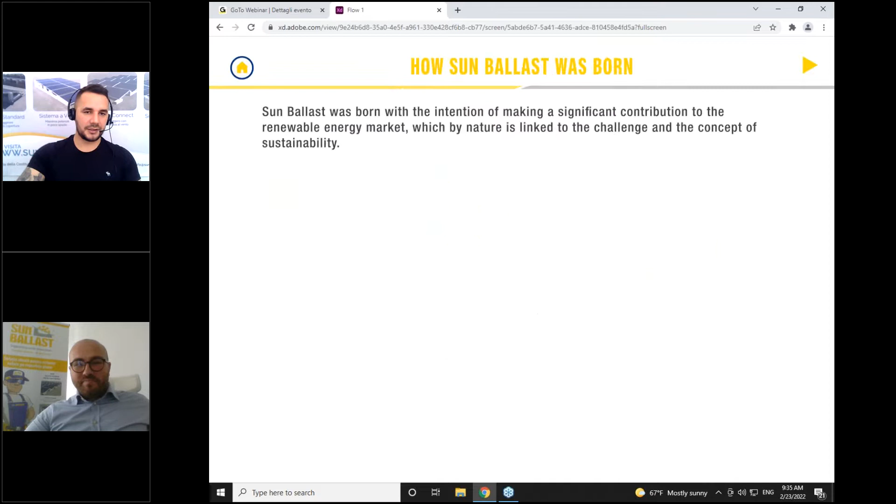So how was Sun Ballast born? Sun Ballast has been in the market now for 10 years. We are a leading manufacturer company in Italy. We produce structures for PV systems. Our structures are made of concrete, with different types, different sizes, different shapes, different inclinations that we offer.

Sun Ballast was born with the intention of making a significant contribution to renewable energy, linked with nature and the challenges we might face daily. It was created by two persons, two friends, two colleagues, who are still very close together: our executive director, our CEO, Mr. Iannuzzi, Maurizio Iannuzzi, and his partner, Giuseppe Di Tella.

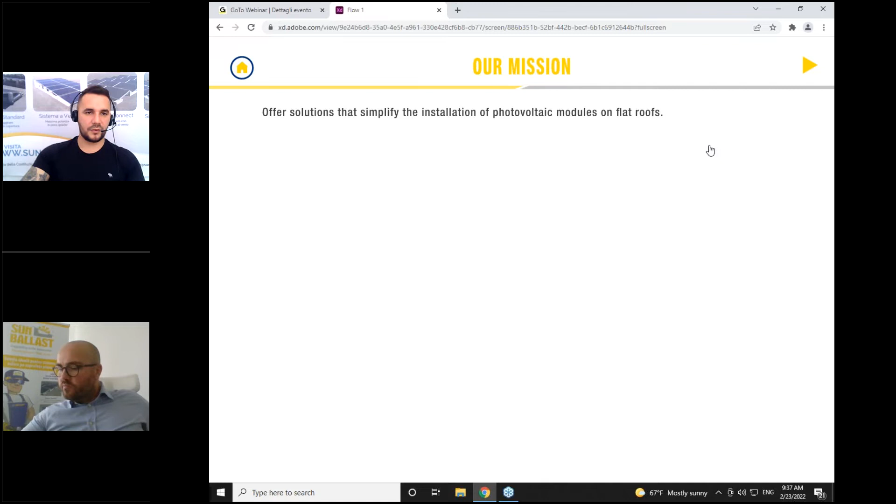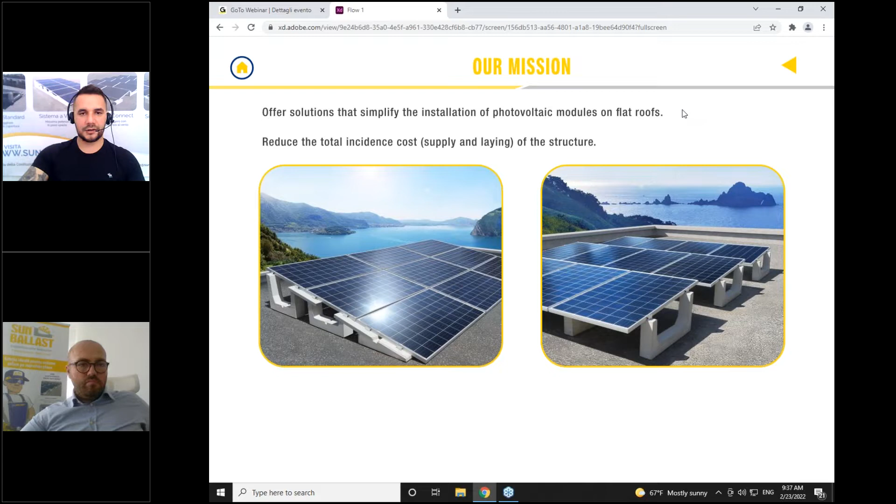So to simplify all the installation of photovoltaic modules on the flat roof and reduce also the total incidence cost of supplying or laying of the structures, we came up with a different type of solution, a different type of system for all the problems that you might have, which we will see together later.

Another question I want to share with you: what do you do in your company? For all the attendants here today, I would like to know a bit more, like what is your profession, what you do for your company. We have installers, we have EPCs, designers, or others.

So depending on that, those were the options we put. Okay, we got 50% so far installers, 20% EPC, 30% designers. All right, it's growing, it's changing. We have 13% others as well that do different things.

So Sun Ballast, what do we offer? First of all, I would like to share with you the consultancy service that we offer. For those of you who've worked with Sun Ballast before, we do offer a free consultancy service. Whenever we receive a project from each one of you, from all our clients, including those who are new, we have a team dedicated to doing all the technical reports for your project.

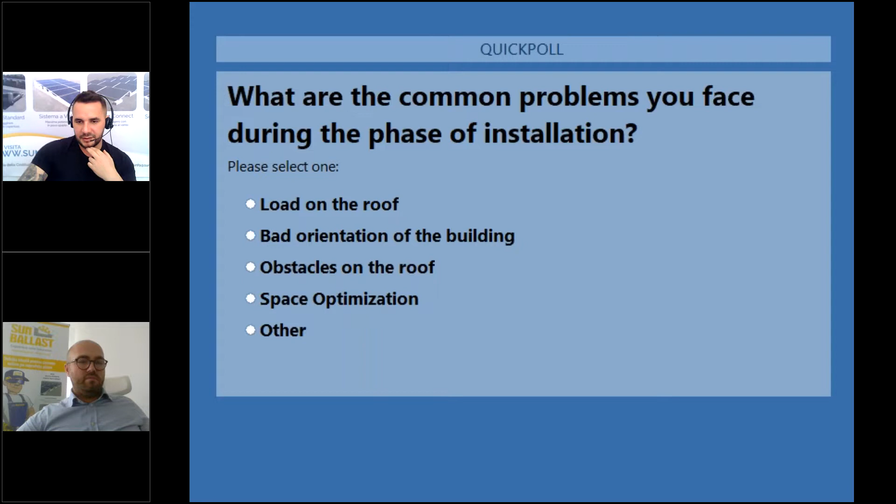Okay, we see so far the main problems that they face are obstacles on the roof at 43%, and bad orientation of the building. I'd like to share this with you so you can see the results: 38% obstacles and 38% bad orientation of buildings, which Sun Ballast already has a solution for both of these, as well as space optimization and the load on the roof.

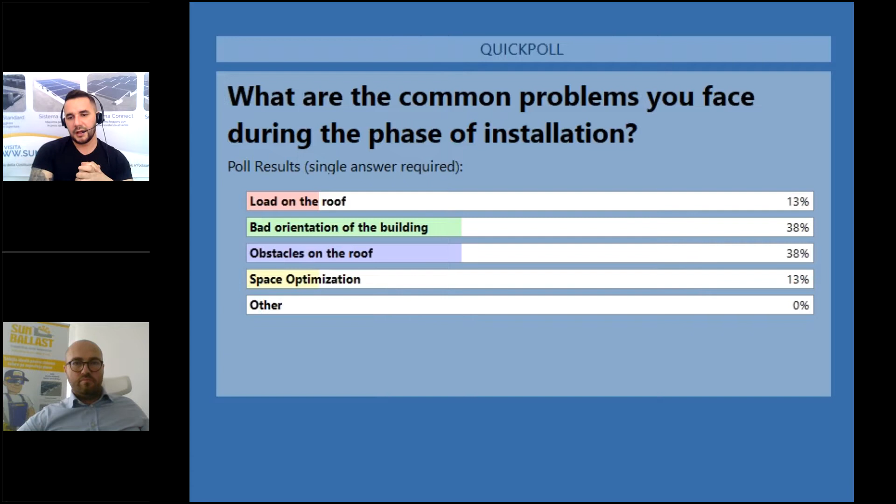First solution that Sun Ballast offers: for obstacles on the roof. Of course, we have a lot of roofs that come with different types of obstacles. You have chimneys, vents, antennas, different types of structures, and it's sometimes really hard to realize the installation there.

So what Sun Ballast came up with was our standard system. Before I start, I'd like to share with you a video that our technical director did using InSun. One second, this will be the video.

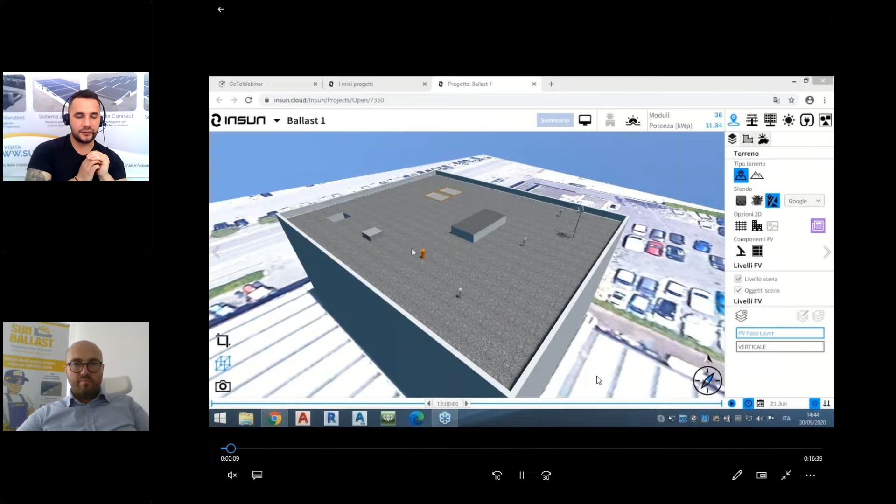Let me know if you guys see it. Okay Alberto, can you see the screen? Yes, perfect.

So what we see here is a software that every one of you can use. It's called InSun, for those who don't know - a software where you can design your system using Sun Ballast structures. The first simulation our technical director is doing, we already wrote the coordinates on the roof, and we took a roof with a few obstacles.

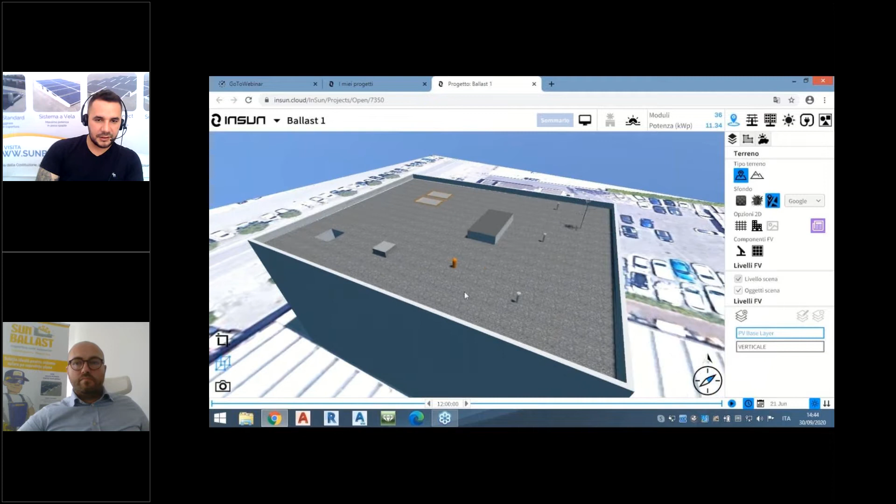As you see here on the screen, Andrea is trying to add some obstacles, and he will add our standard system. Here on the side, he already created a simple system with our standard system, standard ballast.

As you see here, we have a 10 degree ballast being used for this simulation. You will see now how flexible this system is.

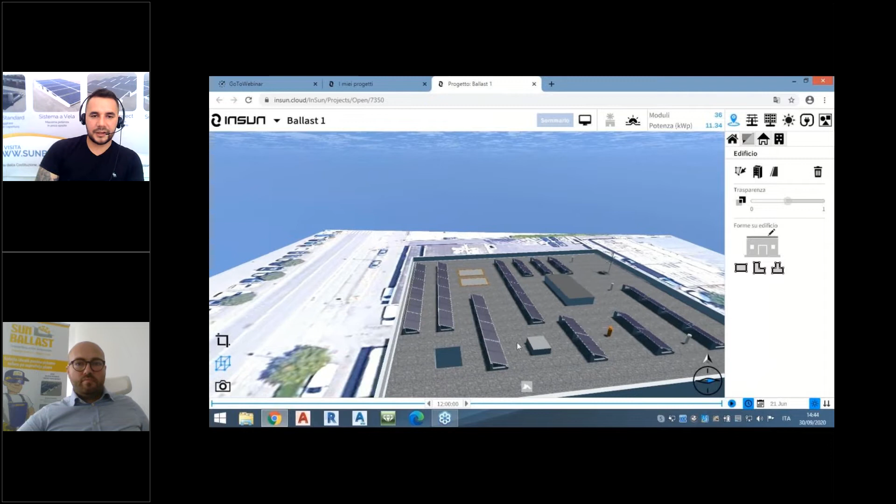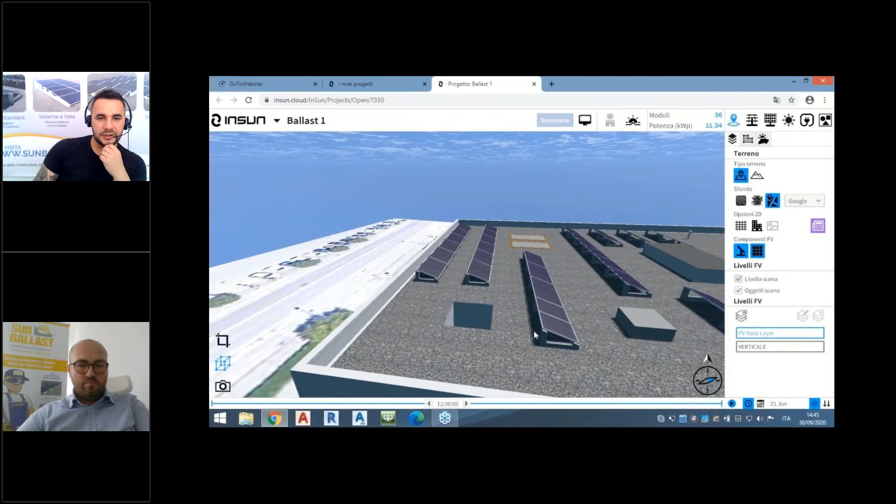The system itself consists of single standard ballast that you can place wherever you have space on the roof. Of course, with this system, you're also allowed to add or remove ballast whenever you want to fill them, always keeping the distance to avoid issues and shading problems between them. As you see, he switched from horizontal pose into vertical pose on the model.

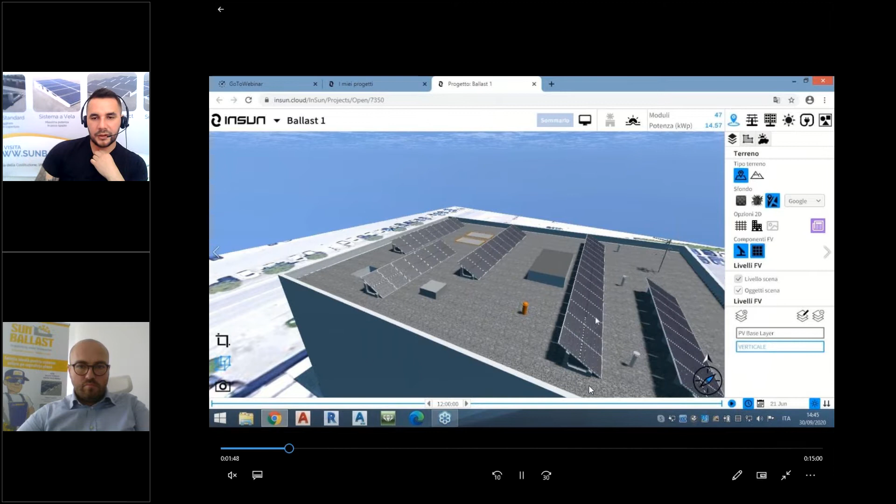For standard models, we can use this ballast even for vertical pose, even for horizontal pose. There's something we'll explain a bit later, because not all models can be placed in vertical pose with all our structures.

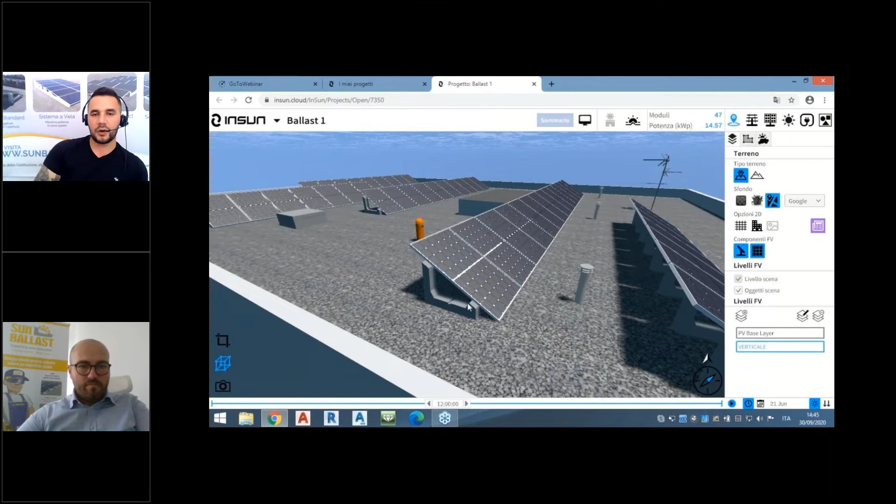So if we're talking about standard models, yes of course. But nowadays we know we have 2x1 models - they're becoming bigger and bigger, and some of them cannot support all the ballast. But for that, we have a solution as well, which I'm going to discuss a bit later.

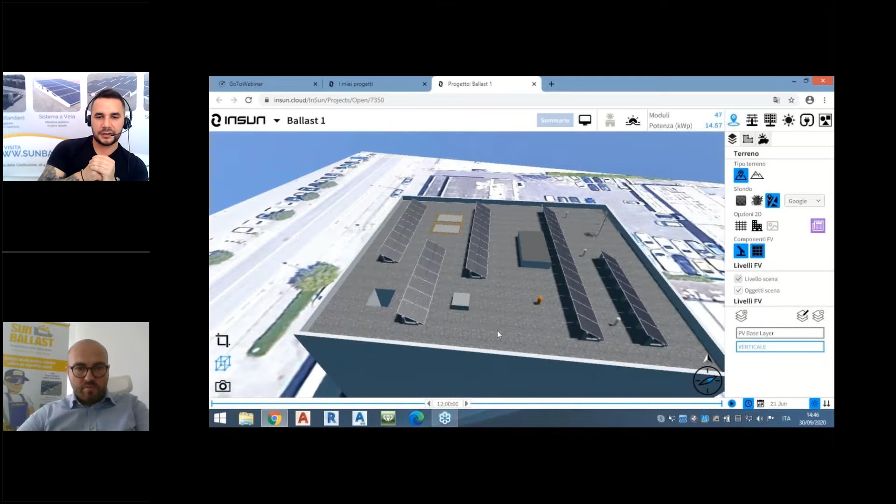Here, Andrea is showing the shape of the ballast. As you see, the ballast is already manufactured from our side, and there's no need for you to drill on it. It comes already inserted with M8 bushings inside, on the top, front, and back of the ballast, in case you want to use any accessories to make the system stronger.

Recapping one more time, advantages of standard system: very high wind resistance because of its weight. It comes with different types of inclination from 0 to 35 degrees, so you can choose any type of ballast you want - 0, 3, 5, 8, 10, 15, 20, 30 degrees, up to 35 degrees in case you'd like a high inclination. It's very quick to install.

Whatever you need to do, whenever you receive our ballast, is just placing a sheet that goes under each ballast, then you place the ballast, the module, and the clamping kit - and voila, the system is already done. These are pretty much the steps. Of course, according to our calculation and the area of your project, we will add or remove different types of accessories.

Low load on the coverage - every ballast, like I said, has different inclination and comes with different weight. We have ballasts that are 16 kilos, up to ballasts that are 70 kilograms each piece. Flexibility is one of the top priorities of the standard system as well - you can move the ballast according to the roof you have, with the ability to circumvent any obstacle on the coverage, plus the wide range of inclination we mentioned.

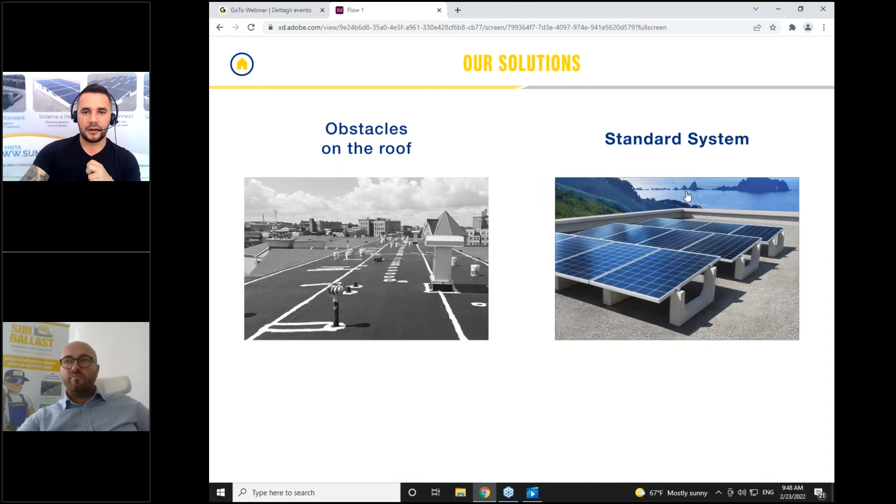Here we move to another solution that Sun Ballast has. As we mentioned before, the question was about space optimization, right?

For those of you who want to do a residential auto-consume project on your roof, a small one with 5, 6, up to 10 modules, we have a system for that, because you might have a really small area of the roof and you want to put as much power as possible. So we created our sail system.

As you see in this picture, this is one of the systems with sail. I'll explain, because we have another system with sail as well. In this video, Andrea is simulating another project.

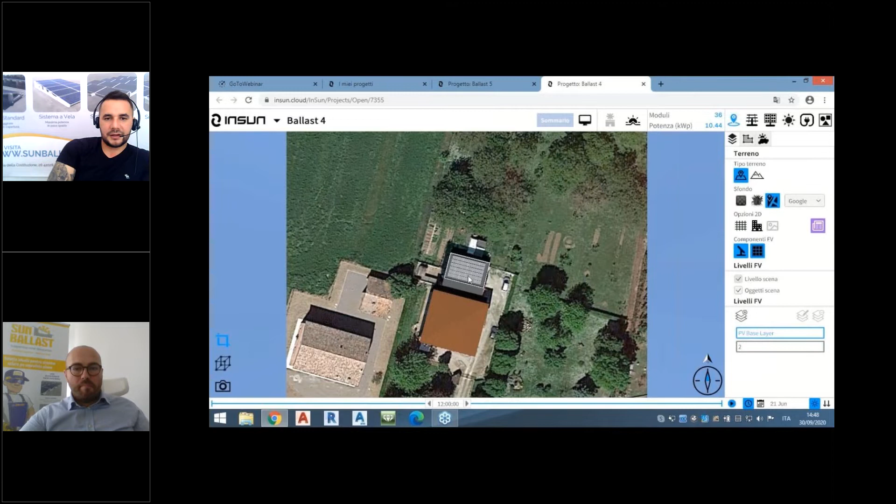The good thing about the InSun software is that you can work online through it, through the coordinates and Google Earth, and choose the roof that you want to do. Here we see a roof that Andrea simulated.

Very little space here. As you see, there are 6 ballasts next to each other. This is our sail system with only 5 degrees. You can use this type of system with the ballast inclined at 5 degrees, and connect all of them together without leaving space between the modules.

As you see in the design or in the video, there is a small space, but that doesn't mean you cannot connect the modules together. It depends on the type of ballast and the type of module you have. Also it can be flexible, because you can add or remove ballasts.

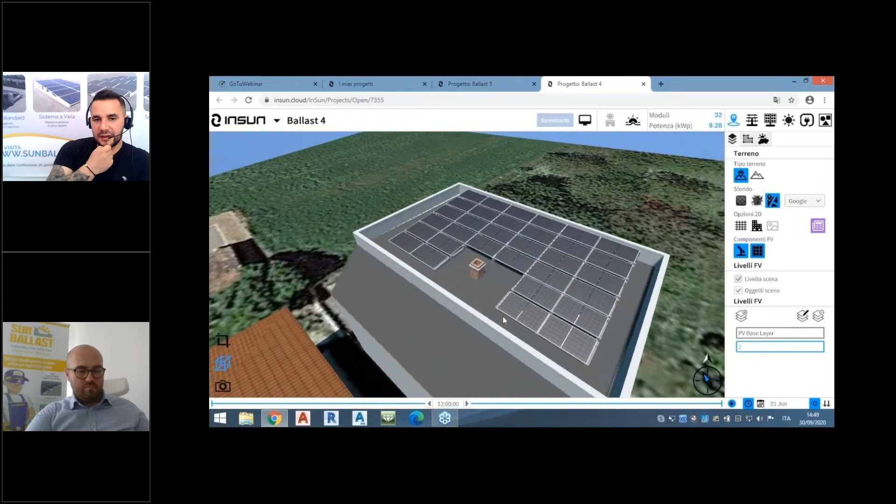Here he created, as you see, a chimney in the middle. So he removed the ballast that was occupying that area, and you can still use our sail system.

This system also doesn't have to come all together. You can order it also by single rows as a standard ballast. You can use from the first ballast here up to the last one as a standard system.

After this simulation, we will see that Andrea created another one using a single ballast from the sail system.

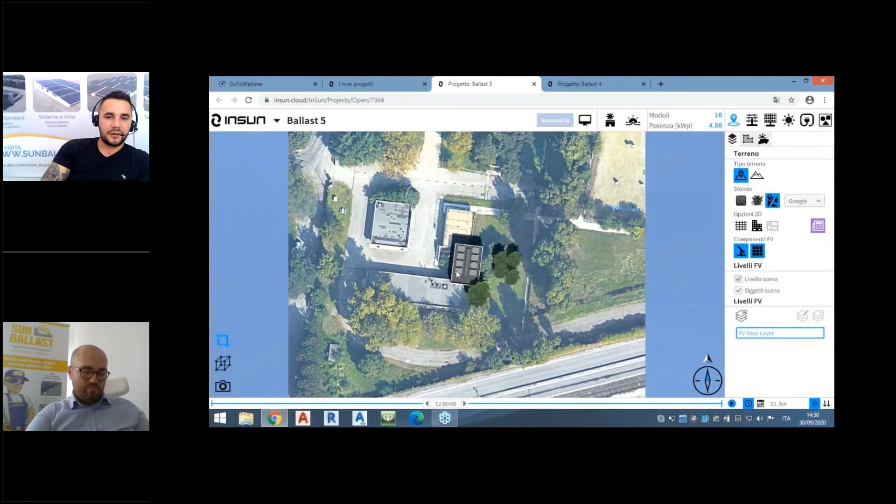There is another roof which Andrea simulated. Here we're going to see that we are using one type of ballast from the sail system, which is the last one: the 5.6 degree ballast, the highest one.

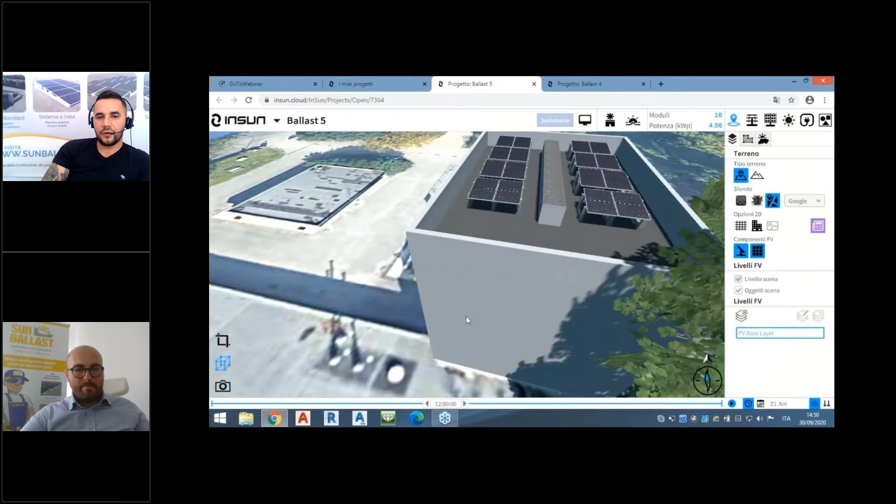The dimensions of it are really high. Why is this necessary? This is necessary for those projects that have high surrounding walls. As you see here, there are high parapets and a tree that Andrea simulated to create shade, and he used only the 5 degree... excuse me, the 5.6 degree ballast.

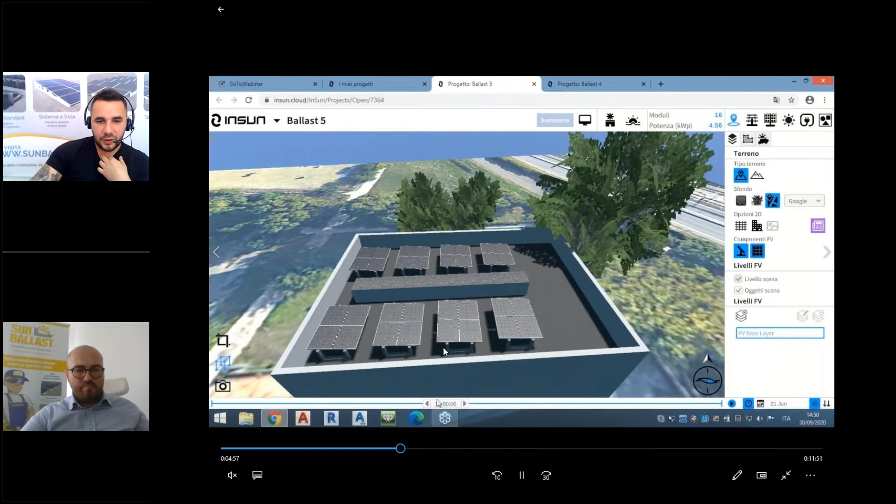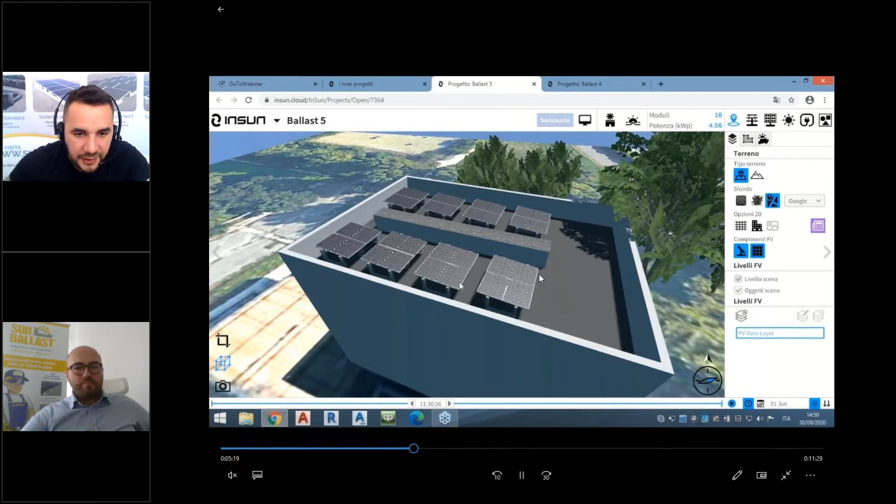As you see here, Andrea is trying to show that you can connect two modules to each other here. You can also add or remove modules. With this system, you can add and remove modules according to the specific layout that you have on the roof.

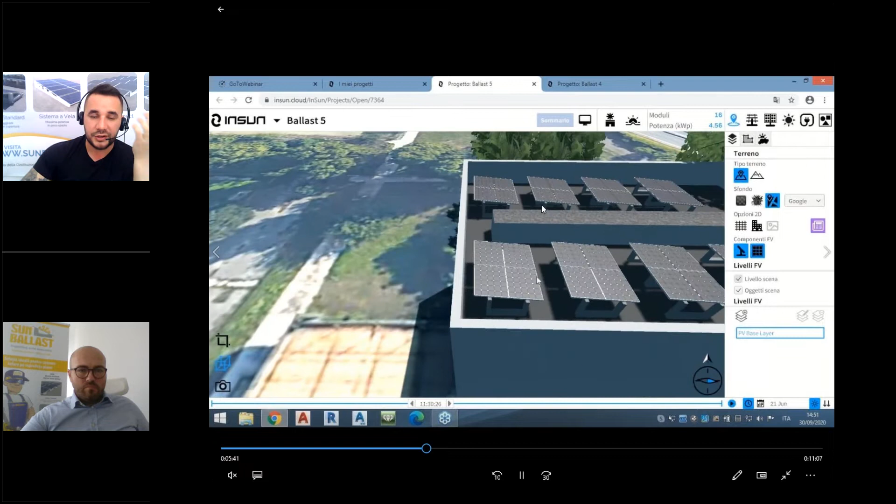This is all for those of you who have an issue with high parapet walls. Our team and our commercials will always suggest whether you can use this type of ballast, or go even lower, or even higher.

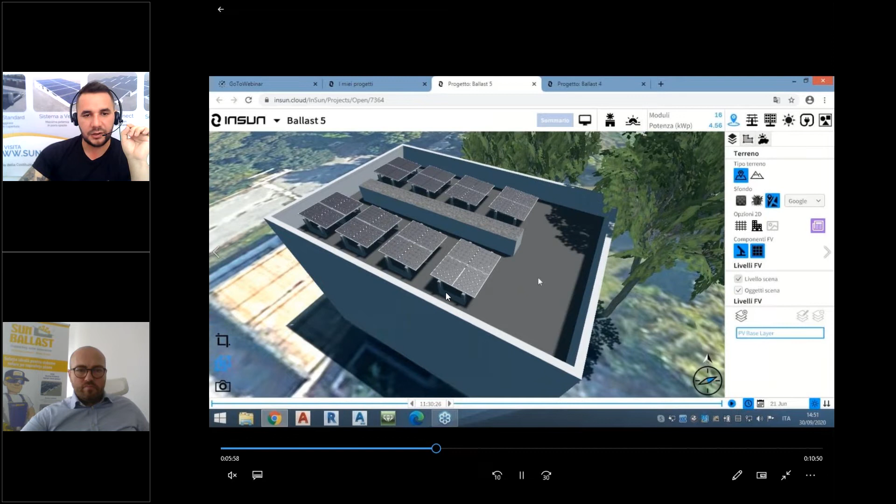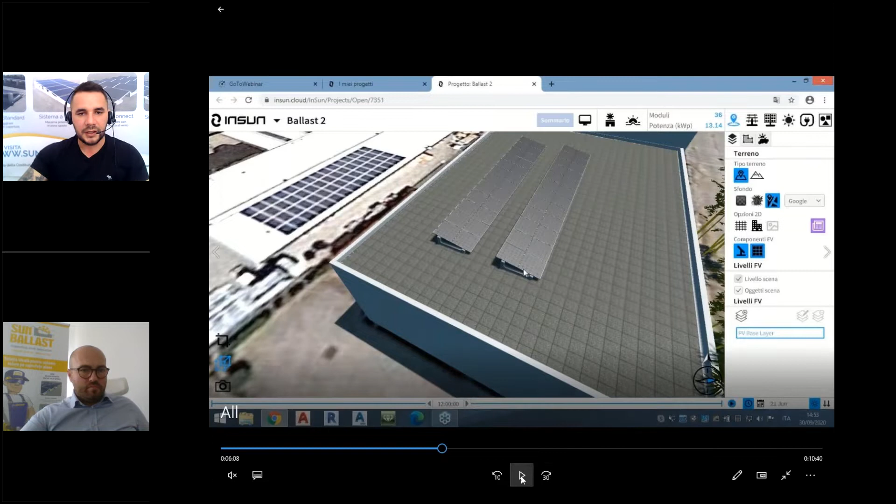Before we go to the other system, I would like to recap the advantages of the sail system. Of course, space optimization is very important, and the sail system already provides that. I forgot to mention that the sail system does not come only with 5 degrees.

You can have it with 11 degrees as well. With 11 degrees, the only difference is that you will have three ballasts next to each other, instead of 6 like with 5 degrees.

You can use those as well as a standard system in case you'd like a higher inclination. You're going to have maximum power in minimum space, fitting as many modules as possible and creating more power. Very, very quick to install. I would like to say that all our systems are very easy to install, and they all share the same idea.

Whenever you need to add accessories, we will be there to assist you along the way. But pretty much it's simple.

Those of you who have done it, okay, we have a question here. I apologize, please give access to Nicola. I don't know if Alex Nicola can hear us, because this webinar is free.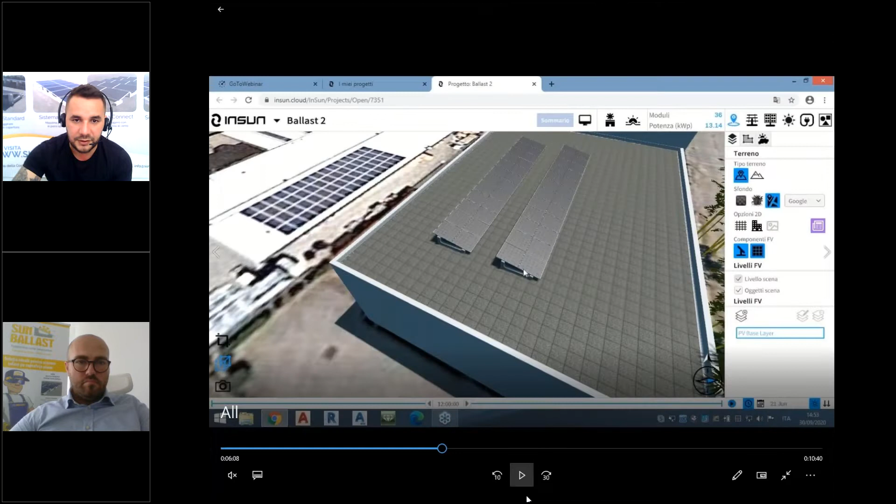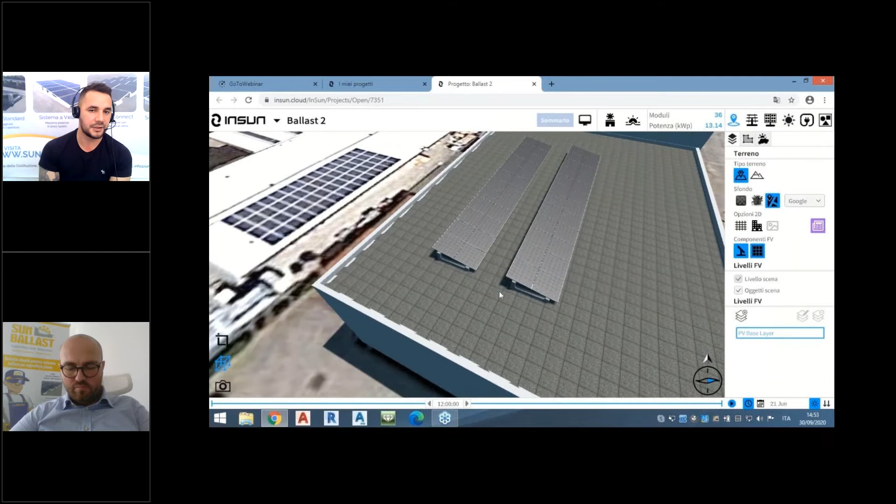In this video, you will see a simulation again with the ballast we came up with for the large models. Here we see Andrea simulated only two rows using a large model. We see that the shape of the ballast is similar to all our standard ballast. It's completely the same. The only difference is that the distance from top to bottom is bigger, so this will support these big models in vertical position.

We see Andrea will zoom in, and we'll see again the shape of the ballast. It's similar to standard. Of course, nowadays we are in contact with all the manufacturers of modules.

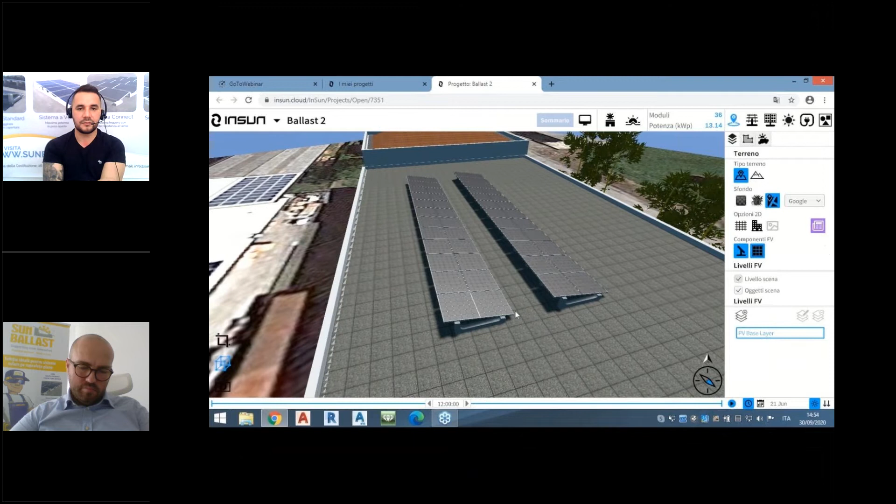So our technical director Andrea is in contact daily with them in case some new models come up, and we always double check if the models can be used for this type of ballast. I want to mention as well that nowadays we are certified by LG, one of the biggest manufacturers of modules in the world, certified for Sun Ballast structures only. You can find that on our website as well, as a news item, whenever you have time to go and read it.

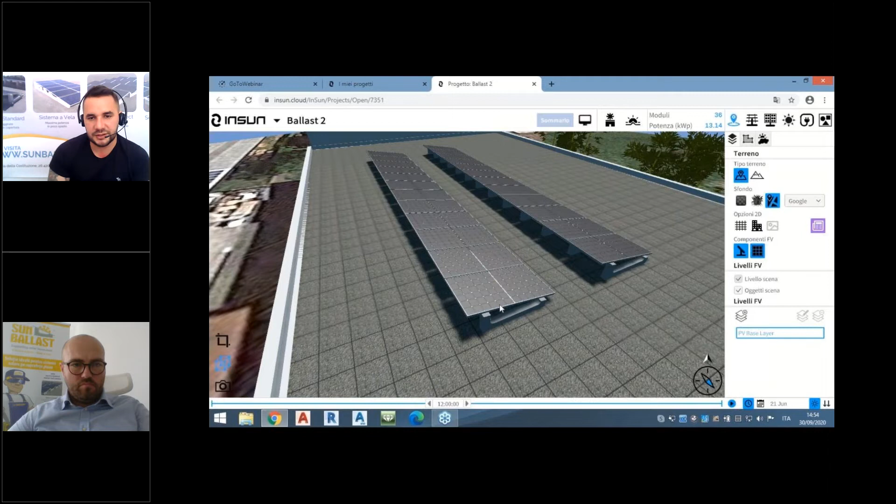So here, of course, always respecting the connection point, because some of you ask, okay, can we connect the modules from the long side, or can we connect the module from the short side? Of course, we can connect it on horizontal position, not only with 10 degrees, but also with a different type of inclination. We always need to double check it before we send it over to you.

Here we see the shape of the 10L ballast, which is similar to standard, just the distance from top to bottom is longer than usual. Of course, always respecting the points of connection and respecting the distance from the other row that you have in front.

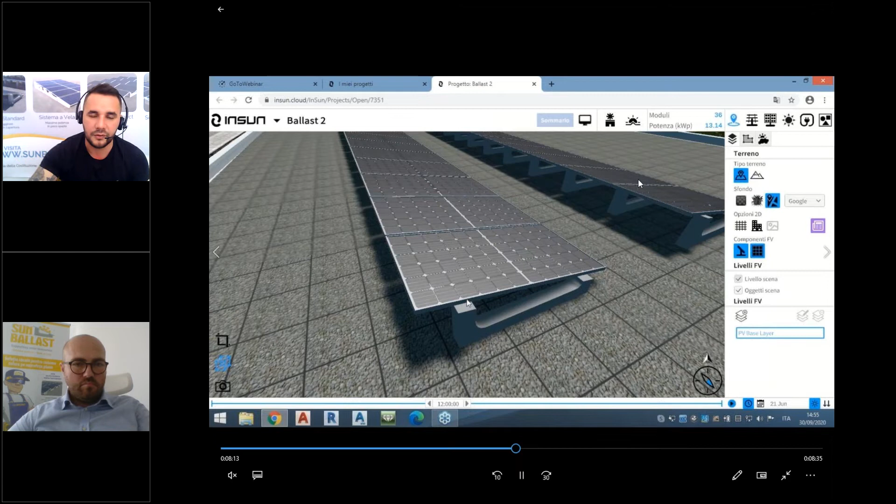All these questions, all these problems you might have, you can always ask our team, and they will be happy to assist you and give you a suggestion. Of course, you can contact Alberto as well for any question, in case we have difficulties in Italian or English, you can write in Romanian. Alberto knows the system better than me now, because we've been cooperating together for a long time, and he will be happy to come up with a solution for all the problems you have. So this is the solution we provide for the 10L ballast.

I would like to mention one more thing regarding the tests.

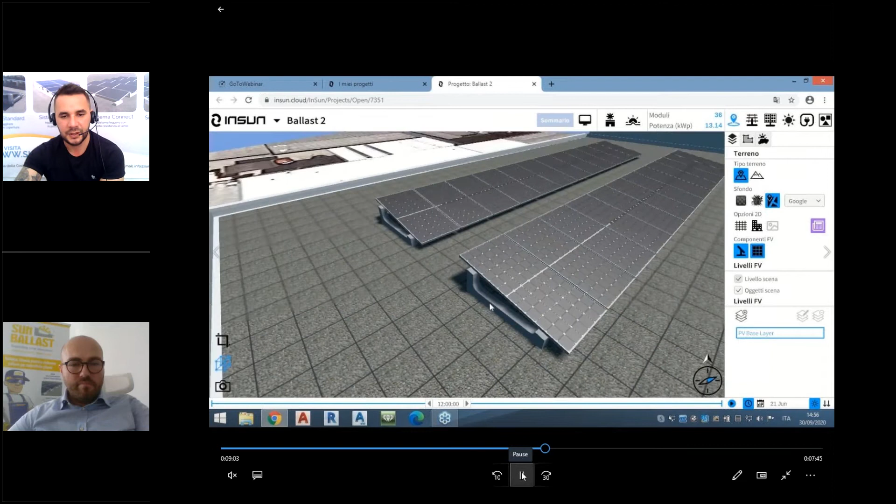So all our ballasts, you can find them on our website. You can ask me, you can ask Alberto. Alberto can share with you all the tests that are done during the phase of the ballast.

So what does that mean? We've done tests for the wind. We've done tests in the laboratory for checking the material of the ballast and checking how resistant it is. As you know, for those who don't know, Sun Ballast come with a 25 year warranty, which we will share with you in case you are asking, and that will be provided by our team.

Moving back to the 10 degree ballast, what are the advantages I mentioned before, I would like to recap again: it will allow the vertical installation of 2-meter modules, complies with the support of fastening points indicated by the module producer. As I mentioned, we will always support all the fastening points, the fixing points. It will increase the resistance of the module to snow load and protect it under warranty.

This was the question I mentioned before, that some of you will say, 'I'm worried about the snow.' Because during winter some areas have really heavy snow, so they're worried that the snow will stay on the module and over time the module will be bended.

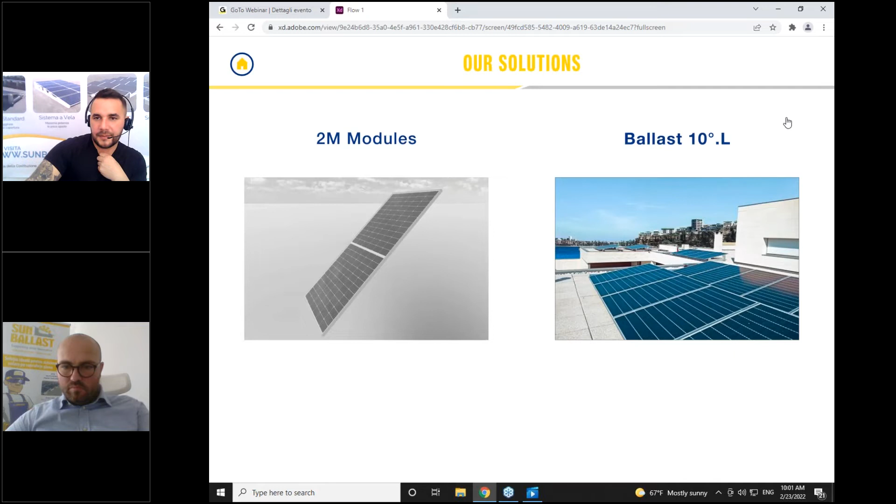One more solution we have, for the second question, is for bad arrangement or bad orientation of the building. Of course, we all have buildings, roofs where you want to install, but your south side, let's say south area, is covered by a higher building, by a tree, or something like that. For that, we came up with the east-west system. Of course, by the name east-west, you've all been using it with traditional structures, probably with a different type of structure.

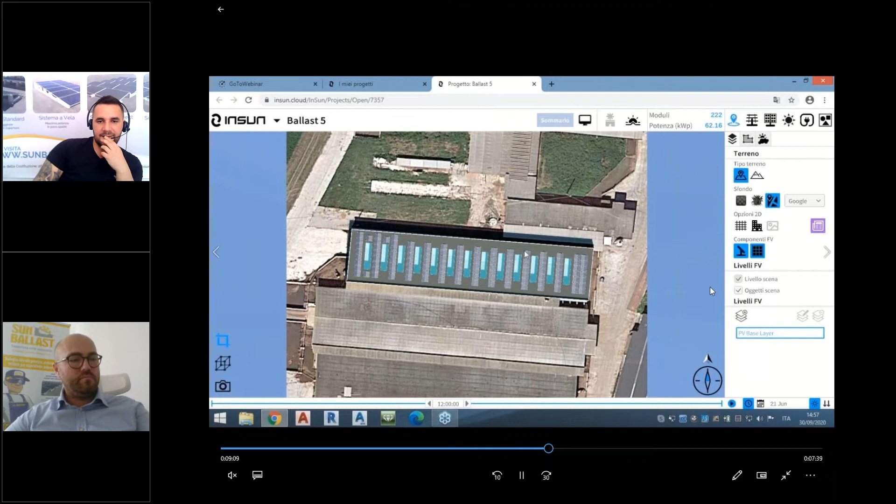With Sun Ballast, you can realize it as well. In this simulation, we'll see Andrea created another east-west system here. We'll wait. Now he will zoom in and show how easy it is to create an east-west system with Sun Ballast.

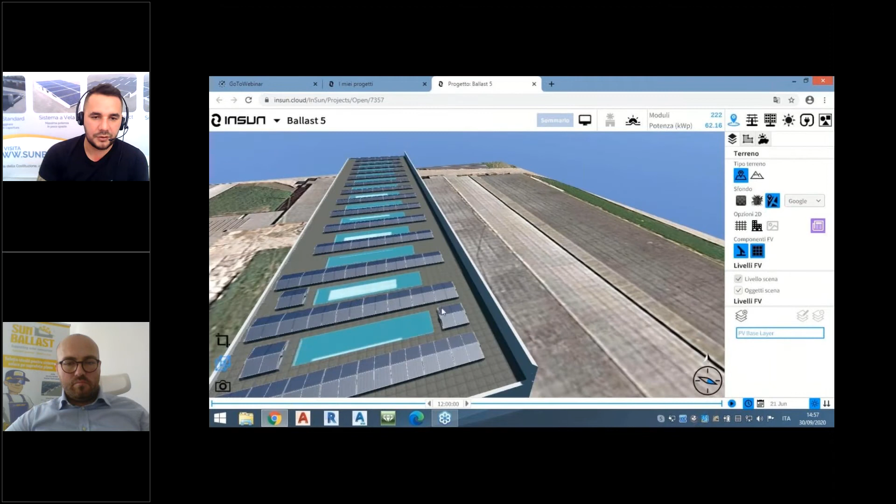Of course, I would like to mention that with the east-west system, you can use all our standard ballast. What does that mean? You can use from 0 up to 30 degrees, depending on the inclination you want for the east-west system. The way you create an east-west system with Sun Ballast is just placing two standard ballasts back to back to each other.

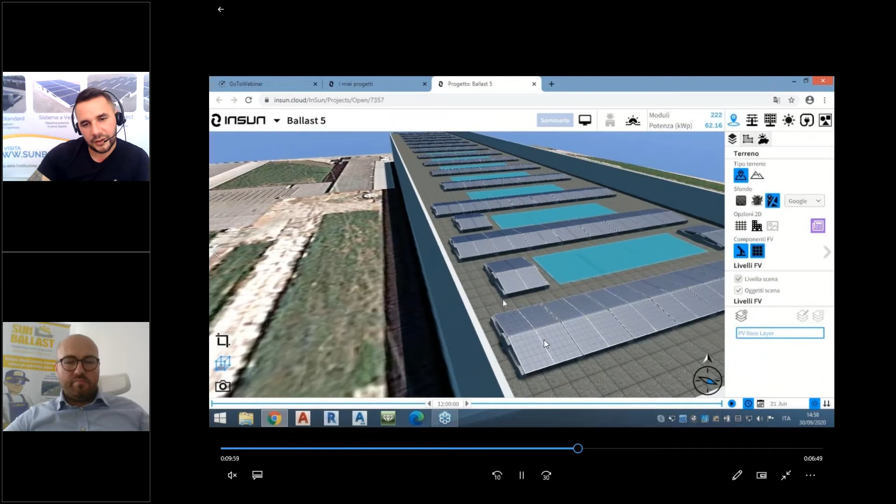Now Andrea is going to zoom and show us how easy it is to create this system. He is pointing out that there is no space needed with this east-west system. Here you can see there are two ballasts back to back to each other. One more thing, the good thing about it is that it's flexible.

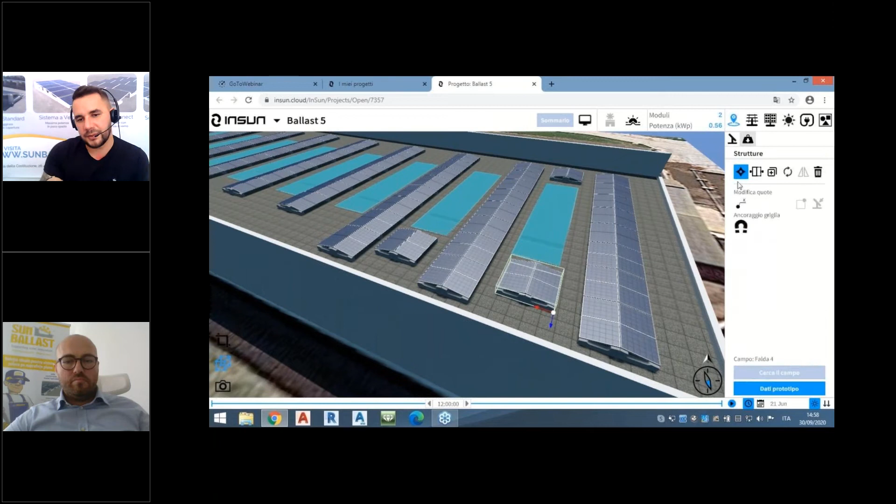It's like a standard system, you can always grab them. He will simulate, he will grab two modules and place them on the other side, or connect them with the first row. Here we see that you can connect it, or you can remove it if you don't need it.

But what does that mean? It will give you a lot of flexibility on the roof. It will allow you to create a path in case you want to move around and clean the modules. With the east-west system, this is possible as well.

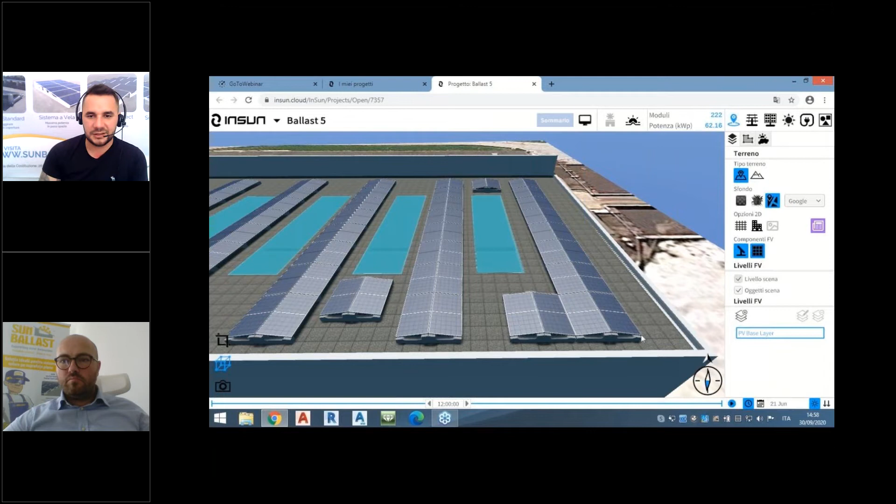The good thing about the east-west system is it's very high wind resistant and requires fewer accessories than almost every other system we have. Due to the shape, it will not allow the wind to move the structure or create difficulties. So you will not need extra accessories, you will not need additional weight.

Here you see that both sides, the front side of the ballast, are back to back, which increases the wind resistance of the system itself. The space between module and module is sometimes around 2 centimeters. Sometimes, with a different type of module or ballast, we'll suggest junction plates only, which is not extra weight. It's just an aluminum part that connects both ballasts together.

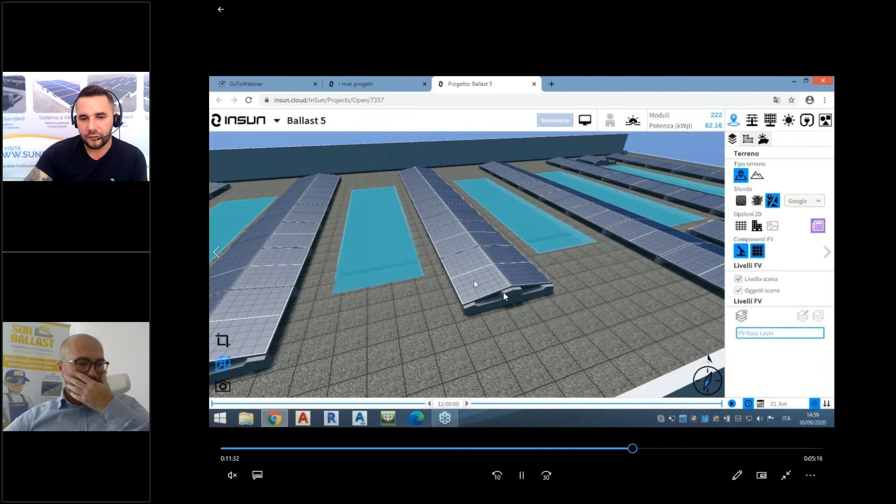Of course, they are already drilled in here, so you can just put the clamping side, and you can move it according to the obstacles you have.

Recapping one more time, east-west system advantages: space optimization, of course, as I said you can move it everywhere, you can circumvent all obstacles on the cover, you can remove or add. High wind resistant, one of the most resistant systems, and super quick to install, very quick. Ability to circumvent the obstacles in the coverage, as we saw in the simulation. Of course, the kilowatt cost is drastically reduced even for this system.

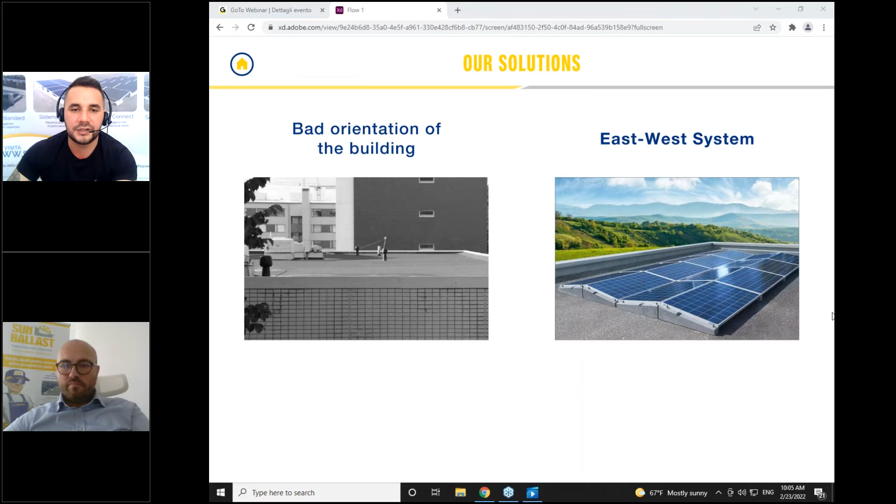What I would like to share with you is one of the systems that probably the majority of you have used. For those of you who know Sun Ballast, probably you had a request to Alberto, you sent me a request, and I suggested this type of system personally. It's called the Connect system, the latest launch of Sun Ballast. It's been more than a year, two years that it's been used. When I say more than two years, it means that in the last two years this system has proven to be the most common and most used among our installers in all of Europe.

So we have another simulation that Andrea did with Insun. Of course, if you have questions about Insun as well, you can contact me, or you can go straight to the Insun page and register for free and start using your own simulation according to the coordinates that you're going to add on the system. We also have on our web page a webinar dedicated only to Insun.

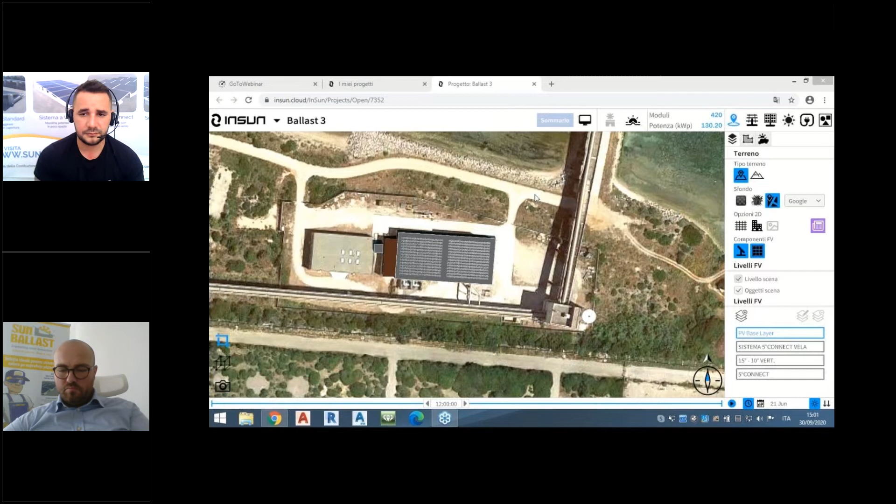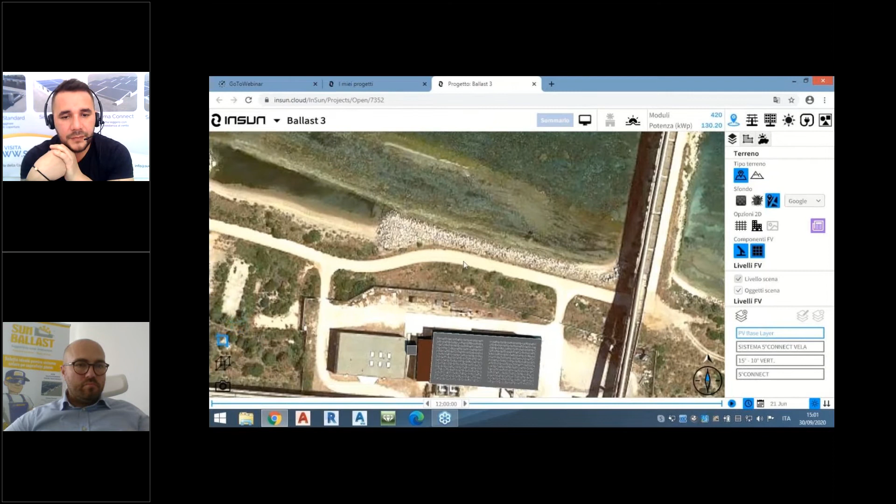Here we're going to see another roof. I don't know the exact location, it's just a simulated roof which Andrea did to show everyone the Connect system. Here we're going to see that there are two parts of the roof where now he goes into 3D mode, and now you can see the structure with the Connect system.

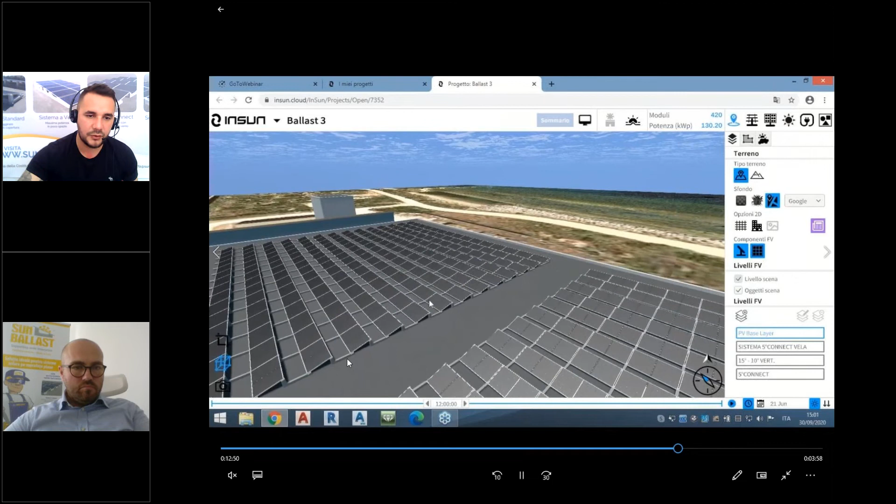Let me talk about the Connect system. As you see from the picture, all the system is linked together. What does that mean? So to have a Connect system, you need three types of ballast. The first one will be the frontal one, which is here on the corner, as I'm pointing with the mouse. The middle ones will be the central ballast, which will allow you to add as many modules together. So the front part of the ballast will be connected with the other part of the ballast, so the module will not be interrupted.

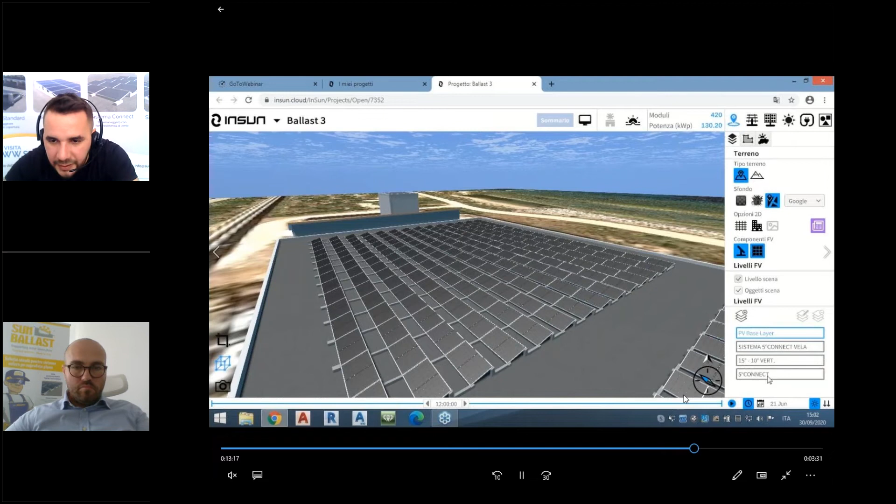Of course, there are different systems, different inclinations with Connect that we might use. And of course, in the end, when you are going to close, there is another ballast, the terminal one. So here he's going to use a layout with 5-degree Connect, as you see, but we can use 5-degree Connect mixed with the Vela system. What does that mean? It will allow you to connect two modules with the Connect system as well.

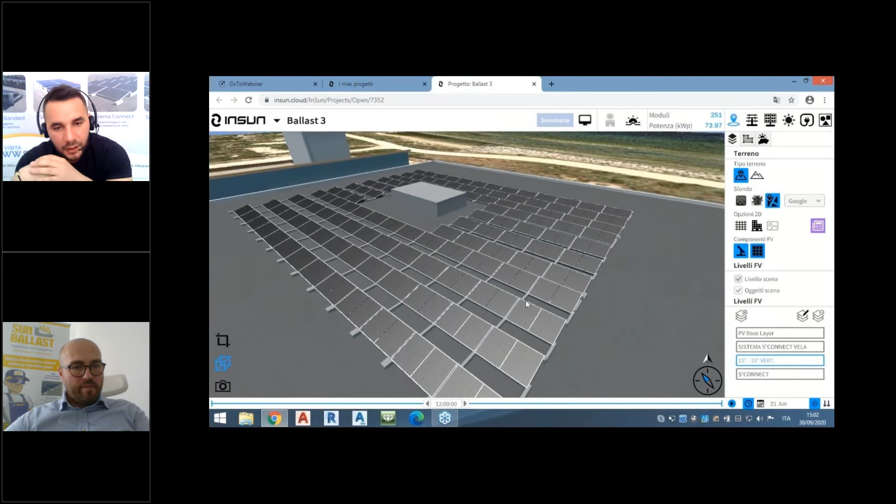Here in this simulation we see we have 5 degrees. Of course, even here he changed it into a vertical pose on 5 degrees only, which is possible. Here, of course, he went again to 15 and 10 degree Connect system. This system, I would like to mention, comes with a different wide range of inclination as well: 5 degrees, 10 degrees, 15 degrees, 20 degrees, 30 degrees. You can have the Connect system.

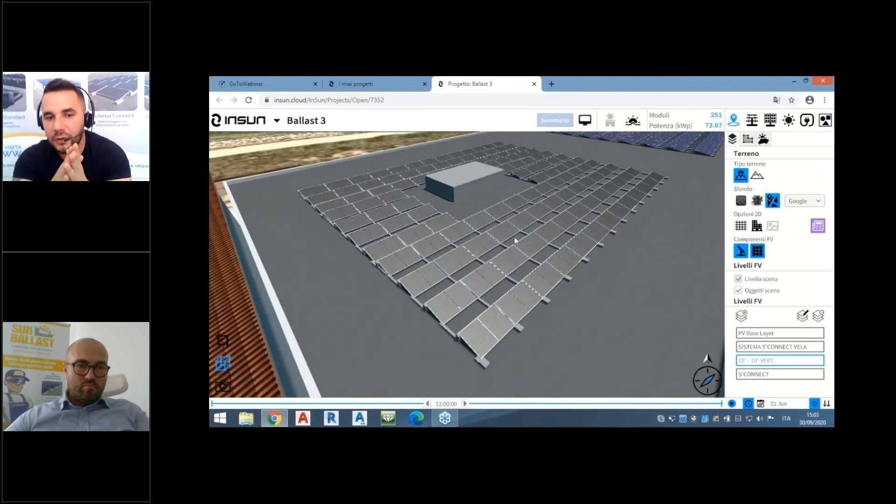The good thing about the Connect system is that it's already linked together. Of course, it will be like the east-west system, really high wind resistant, and it will require fewer accessories in order to make the system more resistant. So it itself is resistant, there's no need to add other accessories. But you can always add additional accessories that we might provide to you.

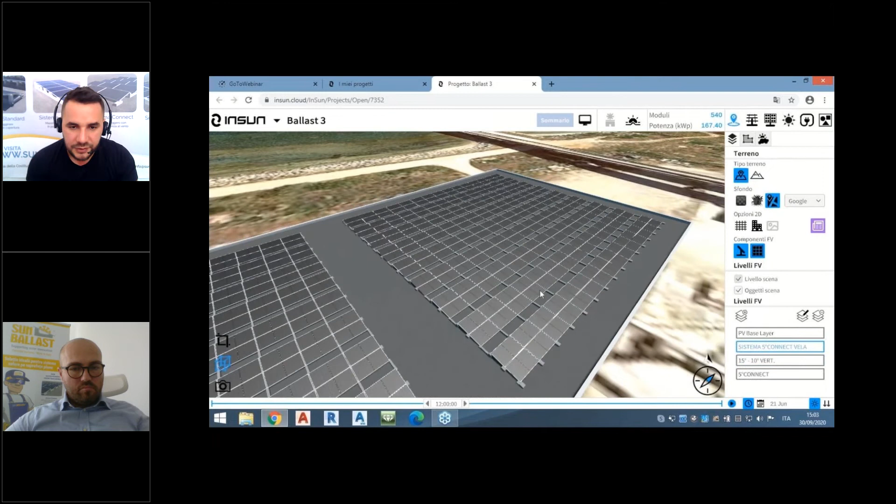Here we see he used the simulation with 5 degrees. There are two modules connected to each other. Of course, here there's going to be a need to add an additional ballast, the one here in the middle that will allow you to connect the two modules together. Of course, the idea will be the same: you're going to have a frontal ballast, and the last one will be the terminal one, always adding only central ballast on top of it.

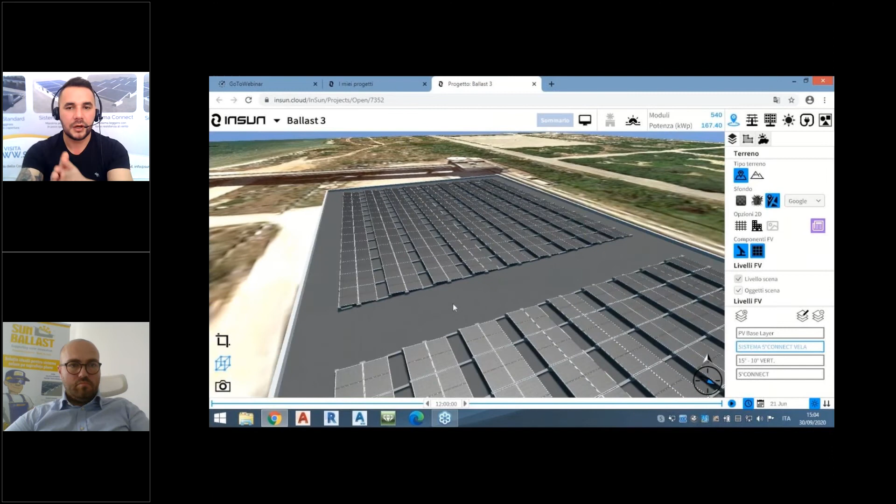One thing I want to mention, the load on the roof with the S'Connect system goes a maximum of 15 to 20 kilos and will not surpass it.

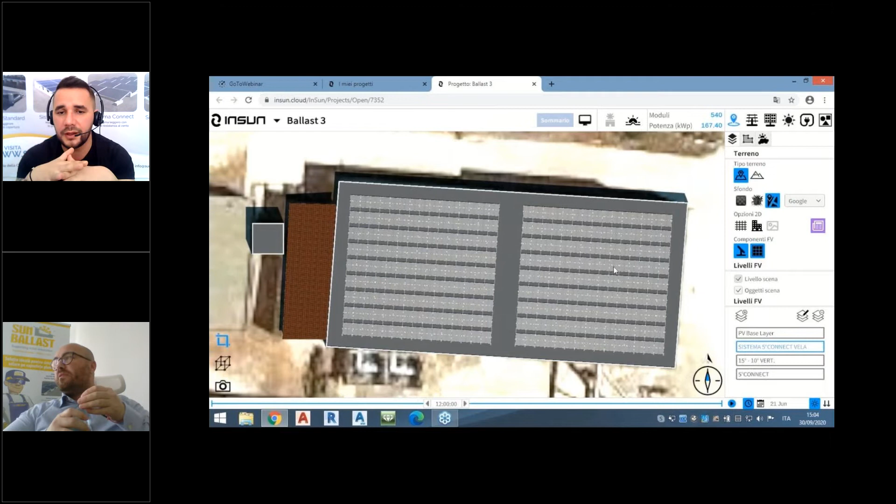Probably will be less than that. So if your client is worried about the load on the roof that he wants to add, you can always suggest a S'Connect system. It is good because for roofs that don't have obstacles, free roofs without anything on them, you can always suggest the S'Connect system, and place as many modules as possible.

Every ballast, every inclination with S'Connect has a certain difference from module to module, so you don't need to worry about shading. You don't need to worry about whether this system will create shades on the module in the back. No, all of these are tested and certified.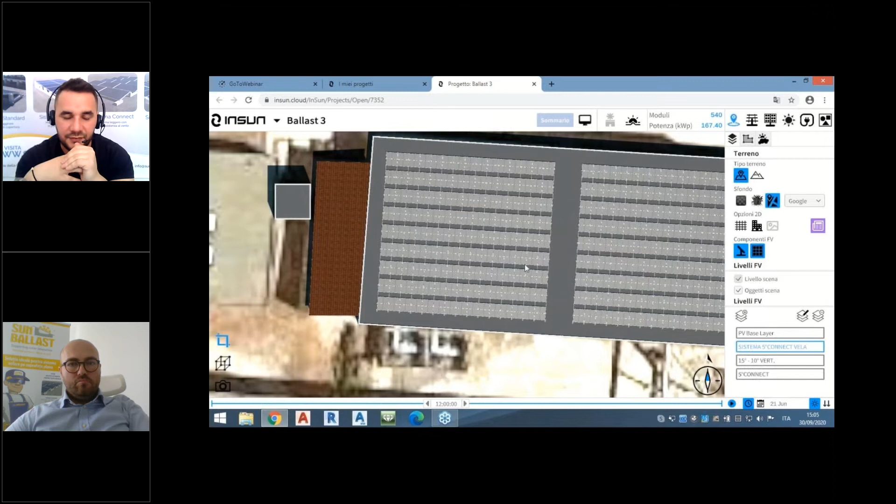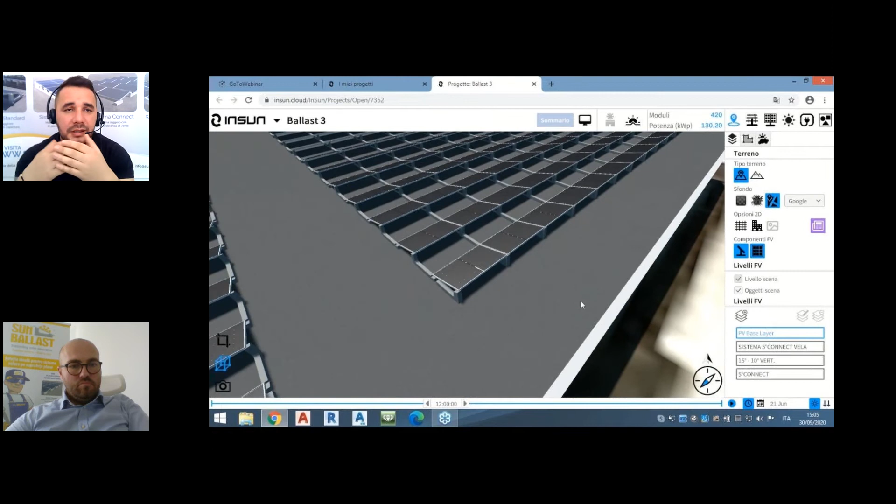But I would highly suggest this type of system for those of you who want to add as many modules as possible and want less load on the roof. You will not be worried at all.

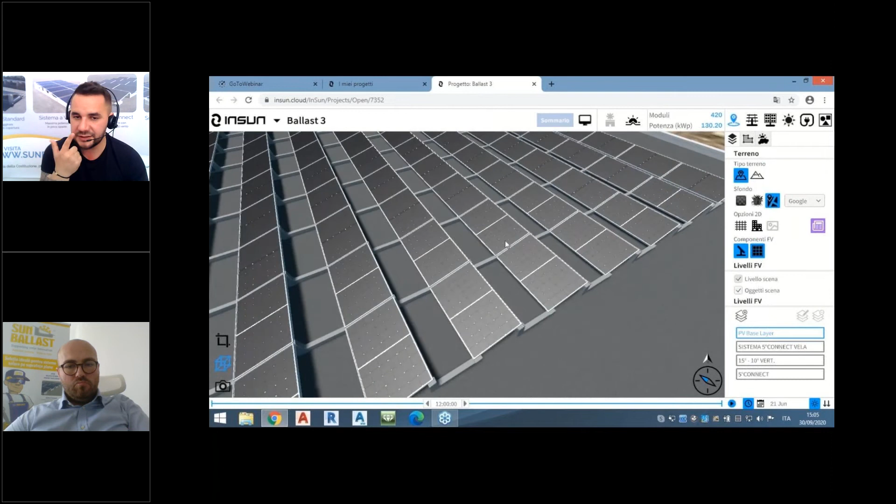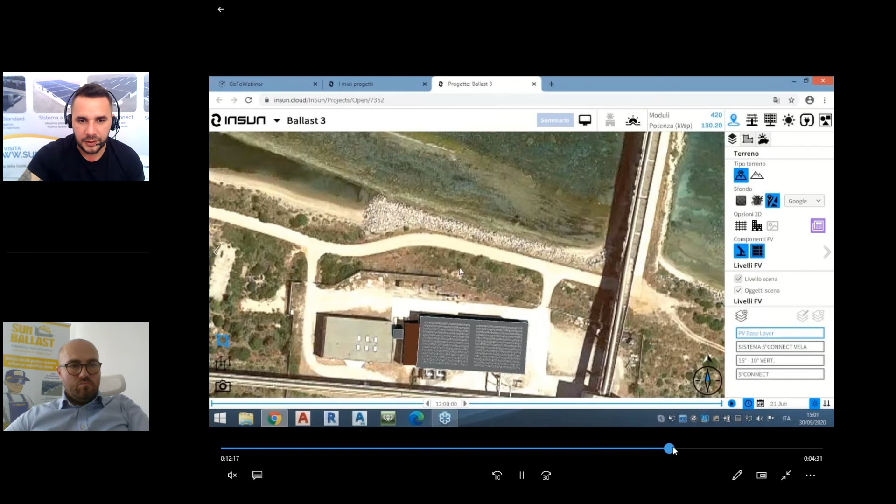There is another additional accessory we can use for this system in case it's required. We'll go over the Connect system once more. In an area highly affected by wind, you may ask, how can you assure me that this system will not fly from the wind?

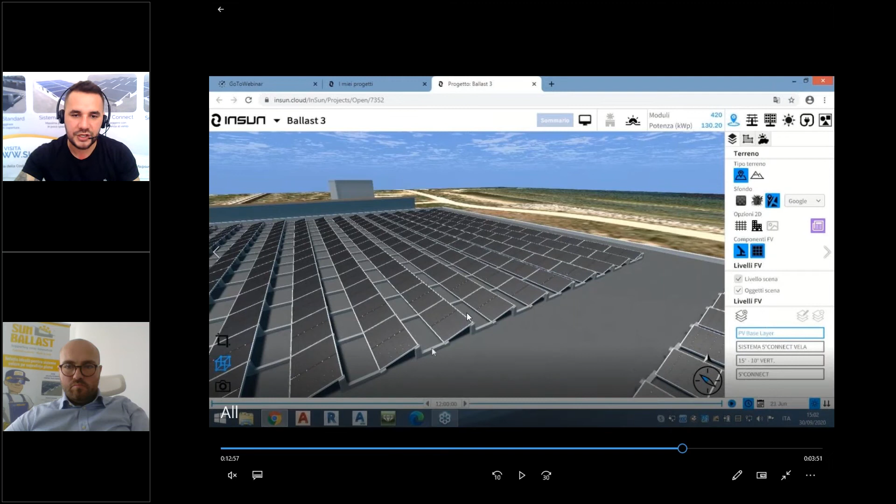Of course, I mentioned that it doesn't require accessories in areas that are not affected. But in some areas next to the sea, or areas with high buildings and all this, we have an additional weight you can use for the Connect system. There are U-shaped concrete blocks where you can insert it on the central ballast, and that will also increase the resistance of the system itself.

So this is all for the Connect system, and I would like to recap one more time the advantages this system has: high wind resistance, really quick to install. As I mentioned, it consists of 3 ballasts - a frontal, a central, and a terminal one.

Low loads on coverage, 15 to 20 kgs, it will not surpass that, probably it will be even less. Kilowatt cost drastically reduced, and low incidence of transport cost. What does that mean? Because this system's ballasts are lighter, not as heavy as the standard system, and that means with less weight on the roof, less transport cost to be delivered to you.

So of course you can find this system with Alberto as well. He has the Connect system there and can provide it to you easily. Why order from us when you can order directly in Romania with Mr. Alberto, and he will assist you. Of course, it comes with a wide range of inclination, as I mentioned, 5 to 30 degrees.

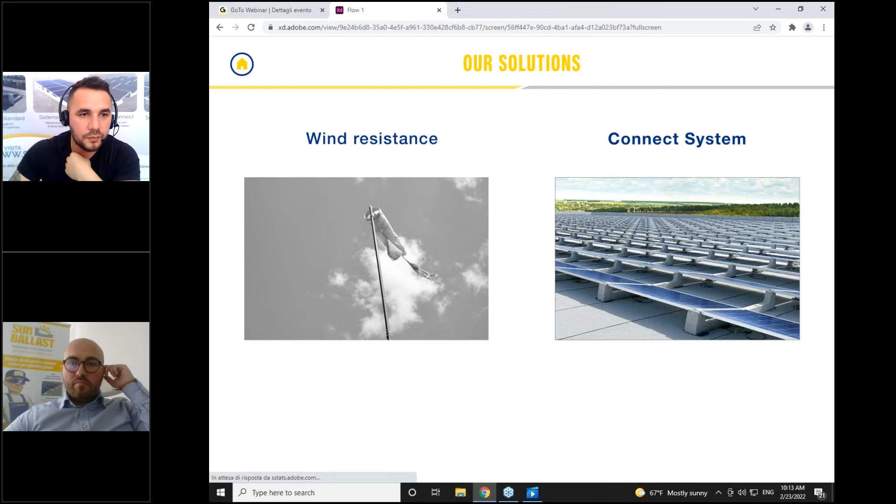Alberto, before I go to the fields of application, I would like to see if we have any questions from the attendants. Unfortunately, I can't see the messages from the participants. Don't worry, I can see it. I can see it, I can go to it. Yeah, all right.

One of the attendants is asking about the loads for the calculation for the standard system. Of course, all the technical reports we provide will give you the load on the roof per kg per square meter, so you don't need to worry about it. Even with standard system, east-west system, sail system, and connect system, our technical report will provide the load on the roof, which you're going to have to discuss with your engineer, to see if it will allow this system to be installed.

I would like to move again to the fields of application. You saw all these systems so far, but you did not see where we can apply, where we can place the ballast. Some of you may not know - is this ballast only for bituminous sheath, or only for pavement, or can I use this ballast on the ground? These are different types of questions we receive from other installers. I would like to start here.

This is a question we get a lot: can we use your structure on a roof that has a slope? Yes, we can use it, with some limitations. From 0 to 5 degrees, you can use our ballast without any problem. We would not suggest going to a high inclination like 35 degrees, but the technical office will look at the slope of your roof and determine which inclination is suitable.

I said 0 to 5 degrees you can use the ballast, but we can go up to 10-degree slope roofs with some help. There is a polyurethane foam which allows you to glue the ballast to your roof, after you place the sheath under the ballast. Here in this picture we have a sloped roof, and we suggested our client use a 0-degree ballast. Under the ballast always goes a sheath - we provide two sheaths, one front and one back, and in the middle you insert the polyurethane foam, which you can purchase from us or buy yourself anywhere. This is used for sloped roofs and we can go up to 10 degrees.

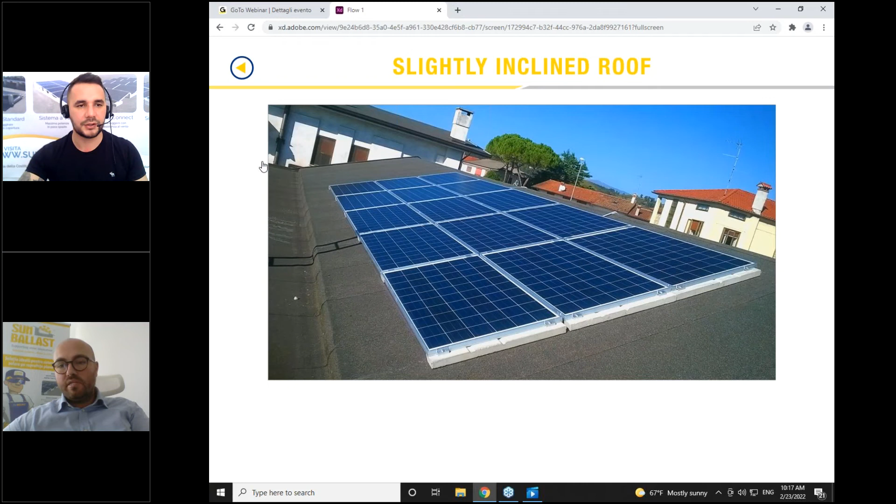We always need to double check, so we need to know the exact slope of the roof and the material of the roof, because you might have a different type of sheath that won't work well with the ballast. So for those of you with sloped roofs up to 10 degrees, please feel free to share those installation details with Alberto and/or with me, and we can assist you.

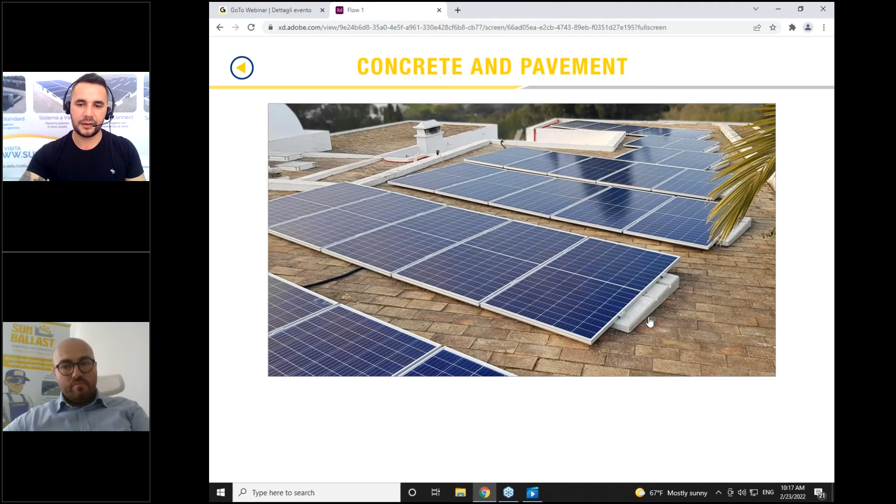Gravel - definitely you can use any type of ballast on gravel. It's easy because you don't need to place a sheath under it; you just implement the ballast directly on the gravel structure. However, some gravel has stones that are too big, which can create movement of the ballast. In that case we'd suggest going inside and placing the ballast directly on the surface. But generally, without issue, you can place the ballast on a gravel roof. Here we see an east-west system which our client used on a gravel roof.

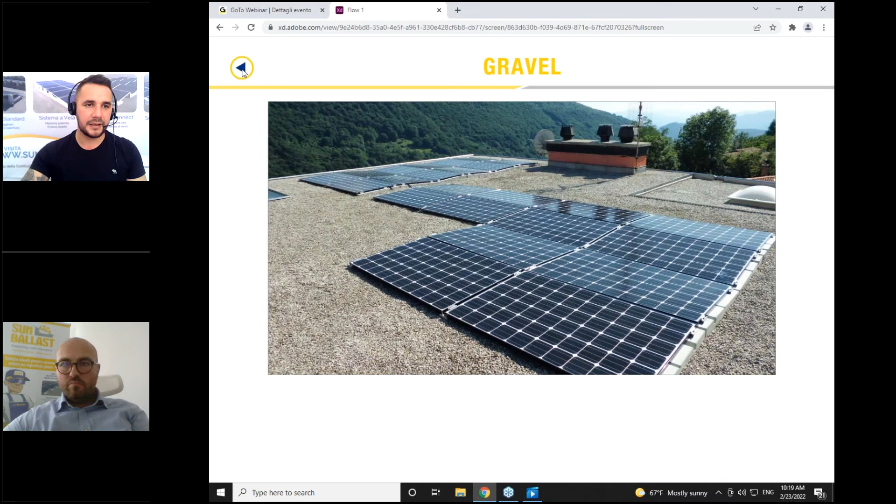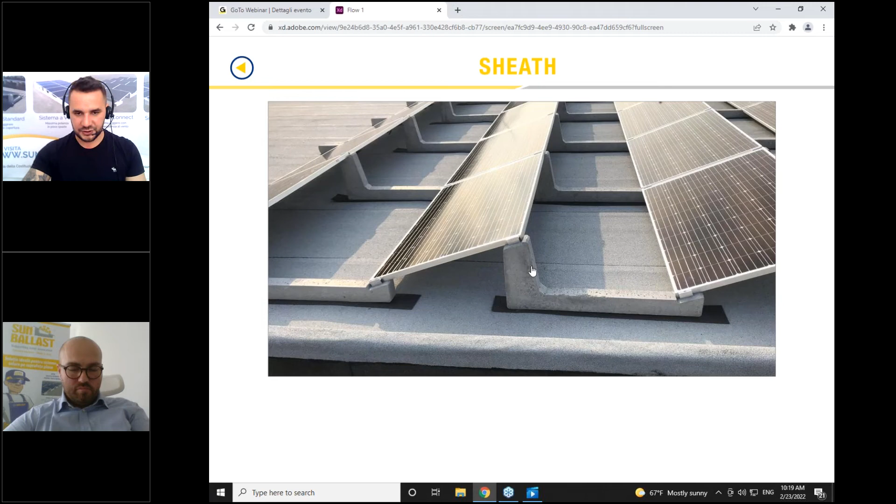Another field of application is sheaths. As I mentioned, the majority of roofs - industrial roofs, private houses, any type - are covered with different types of sheaths: TPOs, EPDM, different membranes, bituminous sheath. You can use our ballast without any issue; of course you place the sheath underneath. I mentioned two types of sheath placement - this was a picture of one of our old sheaths, which was a long one. Now we have a new sheath implemented in two pieces, one in front and one in back. For sloped roofs, you can implement the foam in the middle. This is the standard system.

For those who asked about the back, the bars here, and this weight here - Alberto already has this in stock. It's an accessory we used to have. Now we've changed it to a new accessory called Cable Wind, which you can find on our webpage.

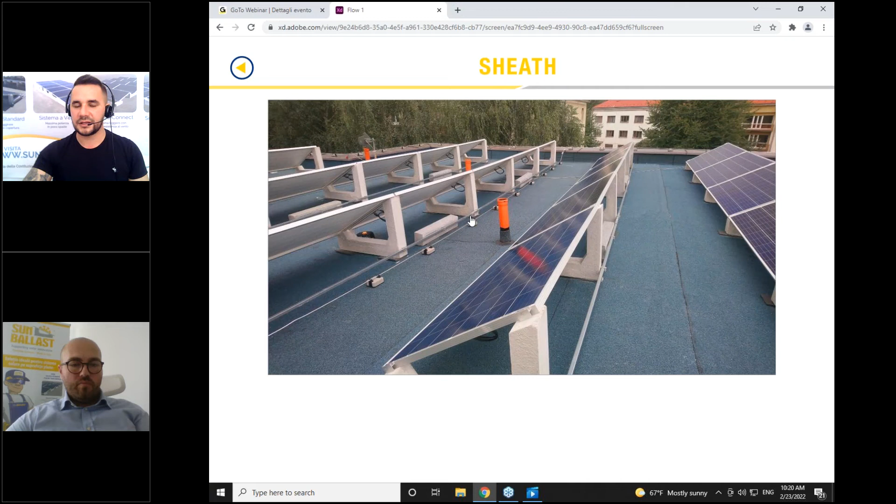Probably we're going to do another webinar explaining all our accessories that you can use with our structure. But this one, you can find it with Alberto. We at Sun Ballast here in Italy, we do not have it anymore, but Alberto still has it, and we still can provide you a system with bars and extra additional weight. According to the preference of the client, we can provide both.

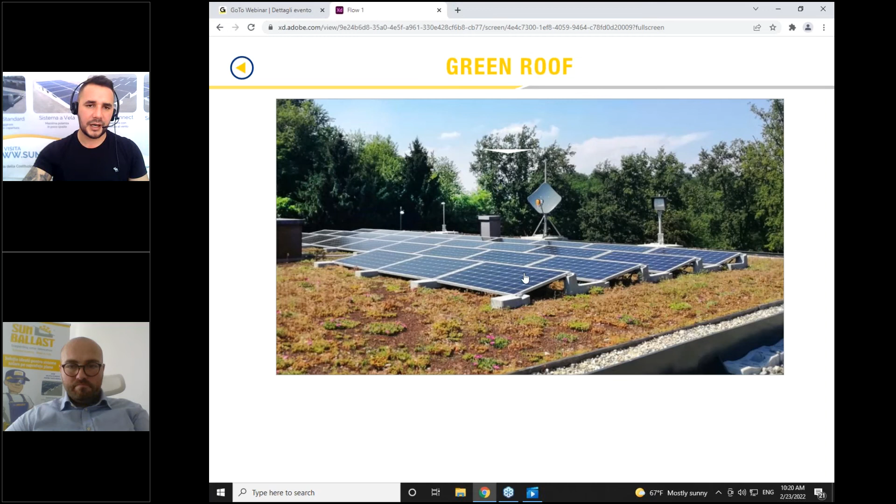Green roofs, as I mentioned, countries like Switzerland, Germany, Austria have a lot of green roofs. They prefer to use a different type of ballast without placing sheath under. As you see in this installation, this is a high ballast on a standard system that the client chose, or here he used a Connect system. The frontal ballast, central ballast, and the terminal ballast, which he used. You can use high ballast, like in this picture, in order to avoid the grass growth, to avoid that.

On the ground, of course, you can use all our systems as well. Some of the customers will be really concerned, saying, okay, I want to use it on the ground, but I'm worried if this system will be resistant, or if it will move. How can you assure me that the system will not move due to earth movement, or due to raining, that the ballast will go inside? So yes, we do installation on the ground as well.

Lately, in the beginning of 2022, now we are almost at the end of February, we had several projects on the ground, and clients are going more and more with ballast structures than traditional structures, because they want to remove the headache of drilling the ground, dealing with the different typologies of ground. Some of them are not allowed to drill because of the typology inside, there's a lot of stones.

Ballast can be used as well for small and large projects, but always with our suggestion. What I want to say with this is that you need to prepare the ground before you do an installation with our structure. You need to make sure that the ground, the area where you are implementing the installation, is completely flat. We don't want to have a ground that has a different shape, a wavy ground and all this, because this will affect the system. So before we go further with the system on the ground, we'll tell you to make sure that the ground is completely flat.

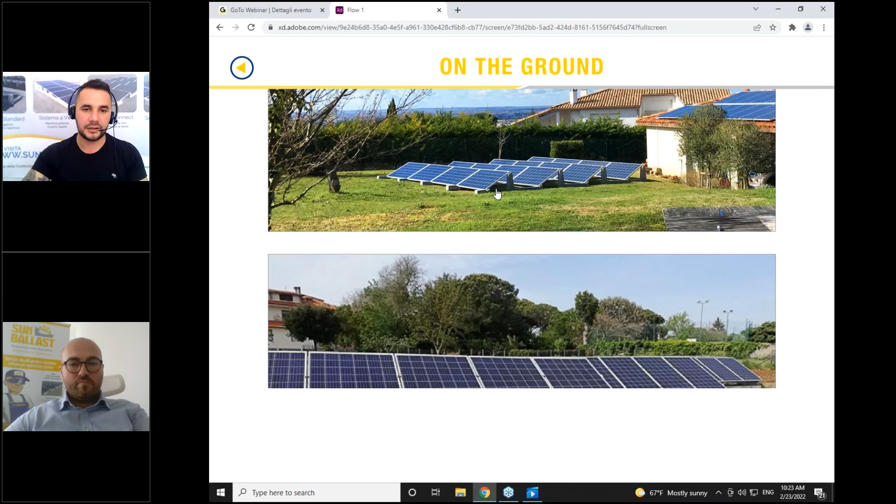What I'm saying here is about the solar field installation. You can use a high inclination, because usually solar field installations require like 30, 35 degrees, they can go even higher, or probably less. You can take our standard structure, our Connect structure, or east-west structure, and use installation on the ground. So more or less, these are the fields that we do with Sun Ballast.